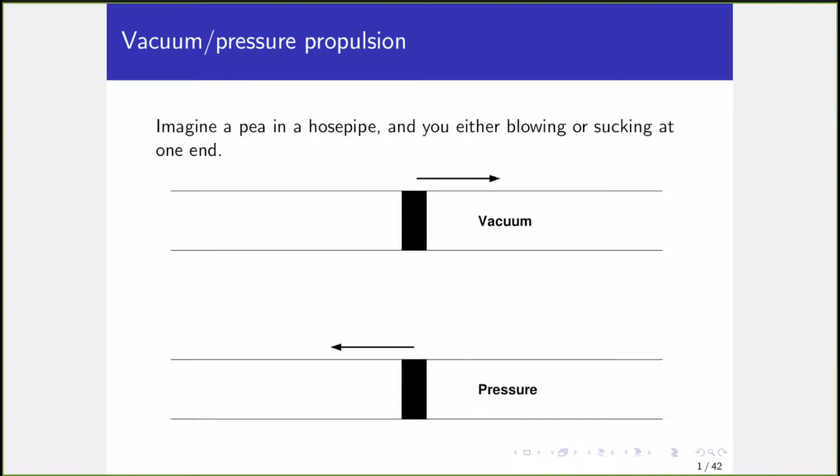So I want you to consider a hose pipe with a close-fitting pea. And then if you blow at one end, you'll not be surprised if the pea travels away from you. And if you were to suck, you wouldn't be surprised if the pea would come toward you. Now think of the pea as a piston, if you will. That's the physics. Just keep it at the back of your minds.

In about 1827 appeared what turned out to be a very influential document by a man called George Medhurst, who actually died that year, a new system of inland conveyance for goods and passengers. And what George was interested in doing was using the principle of the hose pipe and the pea to move people around.

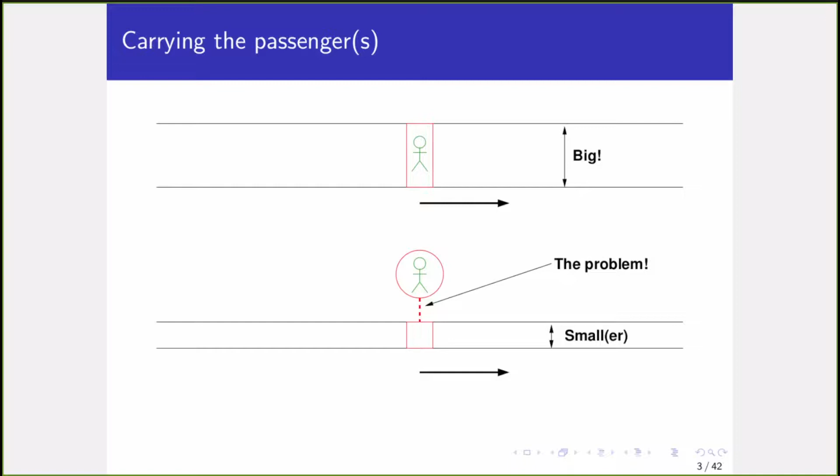Well, of course, if you put the people inside the pea, conceptually inside the piston, this may work, but you're going to need a very, very big pipe, and you're going to need a lot of power to create the blow or the suck. Alternatively, you might have a much smaller and much more manageable hose pipe with a piston within it, which you can push or pull as you please, which is somehow connected to the passengers who are exterior to the pipe. And therein lies the problem. How are you going to make this connection in such a way that the vacuum or the pressure is maintained?

You have to understand what things were like in the first half of that century. Steam locomotion had become a reality in the first two decades or so of that century, and by 1820 was a reality. It was nevertheless very underdeveloped and didn't work terrifically well. By 1830, things had really begun to take off, and there was a massive demand, in the first instance industrially, but increasingly for passenger traffic.

And then by 1840, another 10 years on, this was the period of what became called railway mania. Anybody with a farthing could invest it in the railways and expect to get a good return, and they did. Predictably, this was followed by an economic collapse, 1846-47, and the wheels really fell off the bus, to use a poor metaphor. So Medhurst's ideas being developed in the 1830s were coming just about at the right time. What these people were looking for was a step change in the efficiency and delivery of rail locomotion.

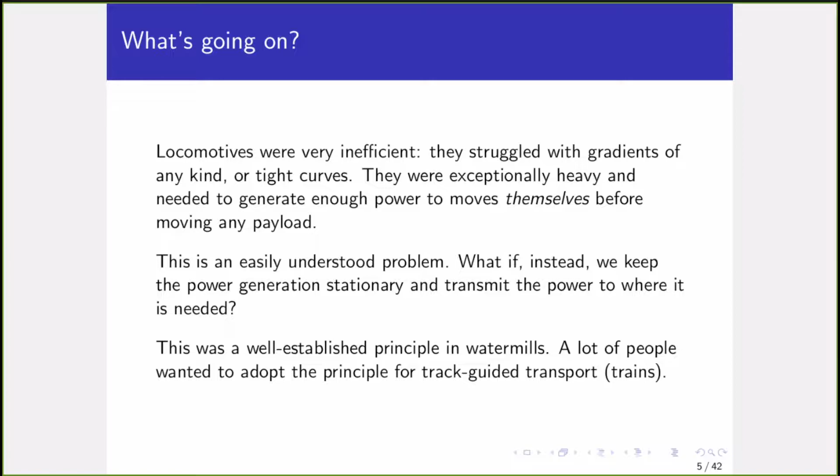The traditional locomotives were exceptionally heavy. They couldn't handle gradients. They couldn't handle tight curves. It took them all they were worth to move themselves before they got going with the payload. And this is an easy problem to understand. If you keep the power stationary and somehow transmit it to the vehicle, perhaps that will be more efficient.

And there was nothing new in this idea. The water wheels are pretty stationary things. They revolve on an axis, but it's possible to transmit the power that they produce through all sorts of axles and belts. So not a stupid idea at all. And as railway mania grew, there was growing interest in the idea of using this atmospheric propulsion, sucking things with a vacuum to move carriages sitting outside the tube.

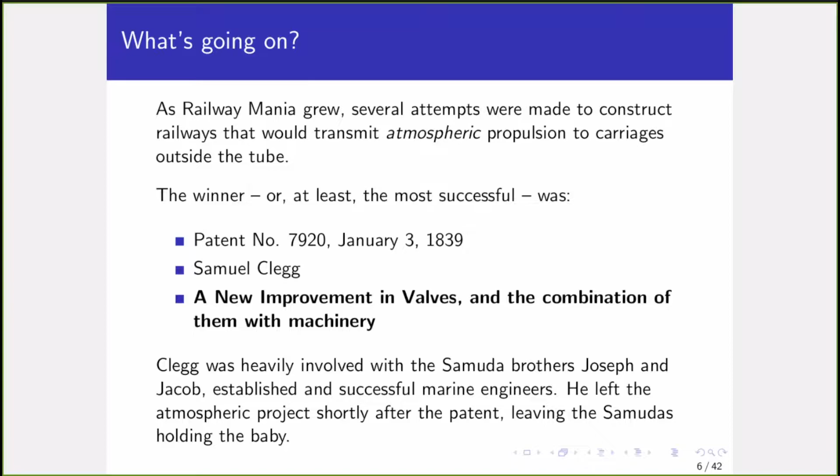And the solution to this problem that gained the most traction was one due to Samuel Clegg, who produced a patent in 1839, railway mania about to take off. Here it was, a new improvement in valves and the combination of them with machinery. And Clegg was heavily involved with some serious marine engineers, the Samuda brothers. He then actually moved on to do different things, and the Samudas picked this patent up and really pushed.

Here's the idea. What you're doing here is looking at a cross-section of a pipe. It's a metal pipe, and there is a slot cut down the top, so it's not a perfect cylinder. That slot is covered by a very long strip of leather, which can rise at one side. There's a metal strip to hold it in place, and then there's a lot of tallow and beeswax, which creates, or is intended to create, an airtight seal.

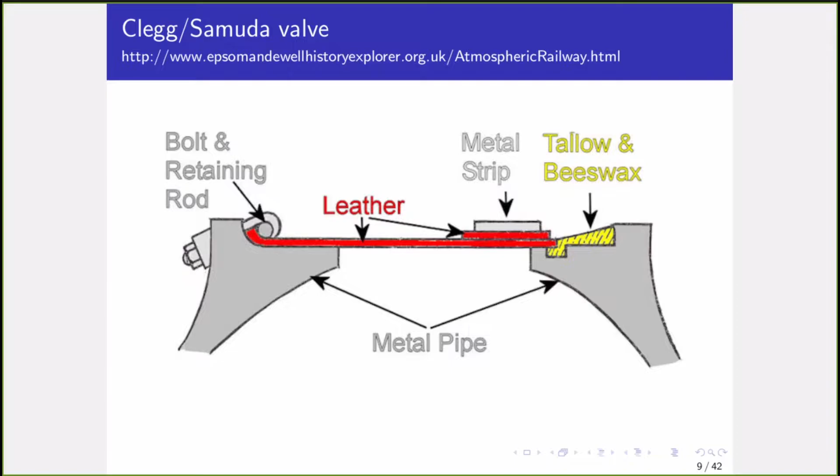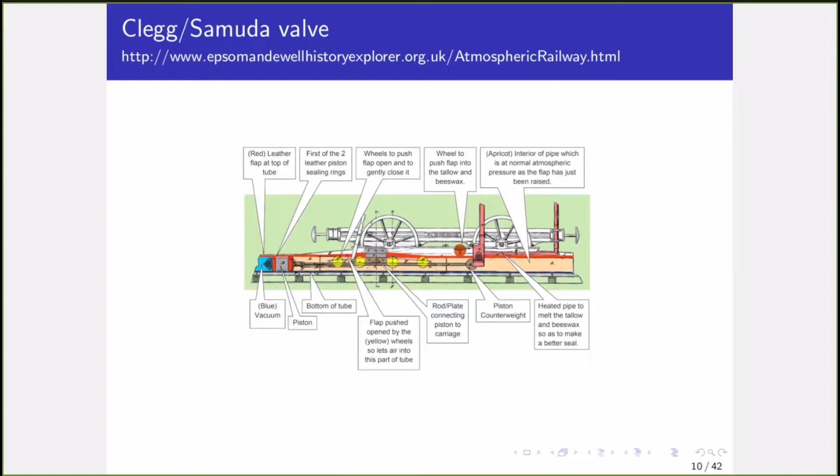Here you see there is the pipe at the bottom, extending to left and to right. Within it is a close-fitting piston. This is the pea, if you like. And that piston is connected to some machinery which goes through the valve, the leather valve, to the vehicle which sits atop. And a vacuum at the blue end will suck the piston, and via the rod will cause the vehicle to move. And that was the substance of Clegg's patent, which the Samudas picked up.

And there followed a very public and very bitter debate about this technology. Brunel was in the forefront of those championing it, and Stephenson was foremost amongst those rubbishing it. And there was a very public row.

With the backdrop of this huge demand for efficient locomotion, in the end, 4 lines were built which used the Clegg-Samuda system. A short one in Ireland, a rather longer and very useful demonstration one in South London, the South Devon line, which many people have heard of, I'm sure, and a short one in Paris.

This was the one which I think became best known. It ran from Exeter at the top all the way down to Newton Abbot and ran down the side of the Exe estuary, which was the broad gauge line which Brunel had already engineered, so he didn't have to create the trackway for this. A distance of some 20 miles, he used 8 stationary steam engines to create the vacuum which would suck trains along.

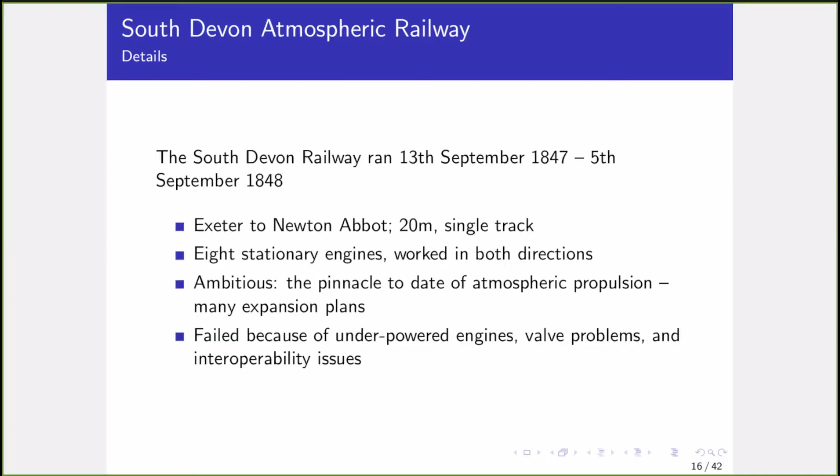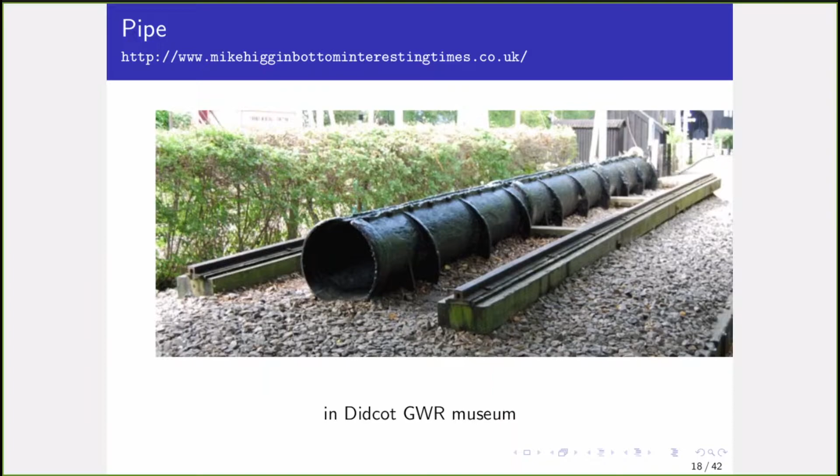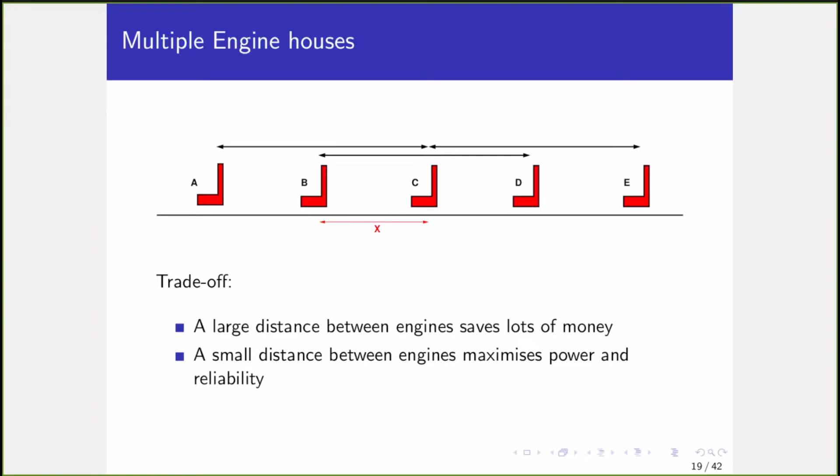All sorts of problems are solved by Brunel, largely satisfactorily. If you've got multiple engine houses, A, B, C, D, E, if you consider, let's say, engine house C, it has to suck air out of the pipe between itself and its neighbours. So the distance between these pumping stations is a very important parameter. If it's a large distance, you're going to save money because you're building fewer engines. If it's a small distance, the railway is going to move more efficiently because it's easier to extract the vacuum. Brunel did all this design before the things were built, so he was taking a bit of a shot in the dark.

The engine houses were powered by the world's biggest steam engines. Brunel was really not short of ambition. He ordered the biggest engines that could possibly be provided. And these were powering air pumps, which were the world's most powerful. Large, expensive machinery, expensive to run. And so they were only driven hard when a train was actually coming. So it was important for the engine houses to communicate with each other very efficiently in order that the engines were only working hard for the minimum length of time. Luckily, telegraph had been developed and was working, but it's another instance of groundbreaking technology being installed as a necessity.

Well, it turned out that what they had thought was a good idea didn't actually work. They were beaten by the materials that were available to them at the time. And by the time they realized this, and Brunel's correspondence with the GWR board can be read to this day, railway mania was over, the economic slump had arrived, and the whole idea, as envisaged by Clegg, Samuda and Brunel, was lost. There were one or two special purpose applications that survived.

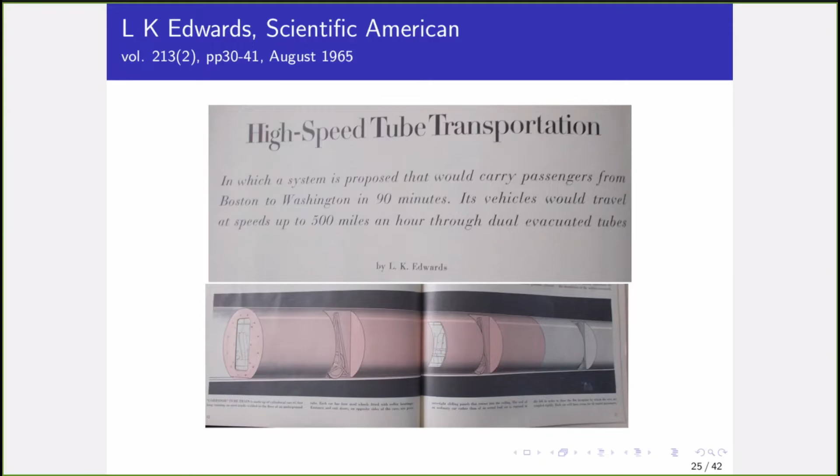Passengers will sit inside these capsules and be sucked along a pipe. And his idea was to connect, let's say, Boston and Washington for a 90-minute journey. And he was anticipating that the technology he was describing, only theoretically, could easily manage speeds of 500 miles per hour or more.

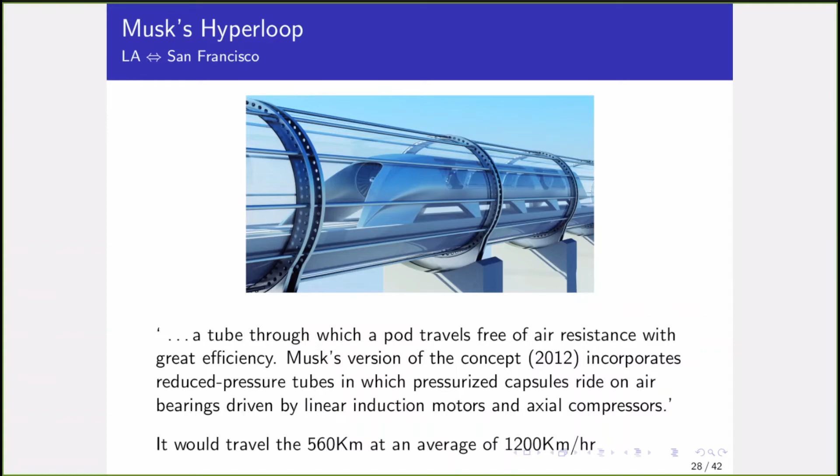Give it another few years and this very recognizable chap appears, and Elon Musk was talking about 10 years ago now about his Hyperloop. And here's a picture. Again, you will recognize what's going on. There's a vehicle inside a tube which is evacuated. The technology really has moved on because he's talking about air bearings and linear induction motors and axial compressors. But Musk is thinking about 10 years ago connecting LA and San Francisco with vehicles traveling at 1,200 kilometers per hour. Think about it.

Musk has actually touched a nerve because a lot of people have picked this idea and treated it very seriously. So you will find around the globe many organizations talking about Hyperloops, which are adaptations of what you saw on the preceding slide. And demonstration systems are actually beginning to emerge, and major installations talking about moving people around at or near Mach 1.

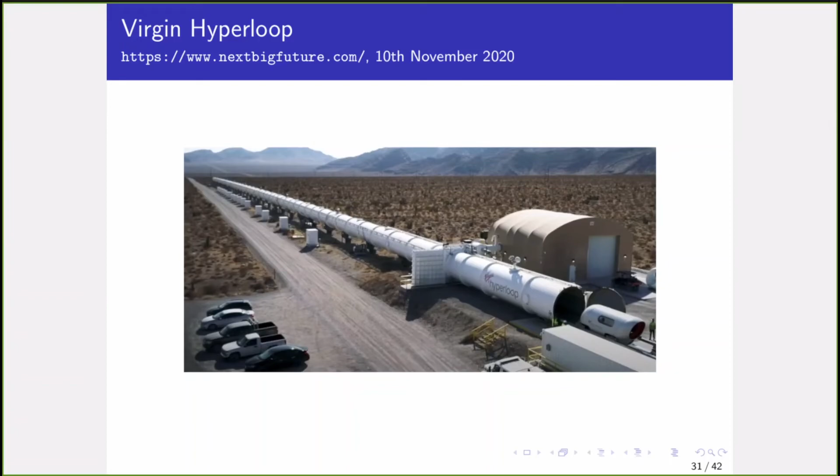And what I want you to think about is that Brunel and Musk, or their organizations, were facing, in some ways, similar problems. There was a demand for a step change in the efficiency and speed of public transport. They face serious financial obstacles, obviously. They face very serious technical obstacles. Engineering has to be groundbreaking, and that's before you begin to consider the health and safety issues and the very popular skepticism that surrounds what they're trying to do. So maybe that's my next TED talk, actually do a compare and contrast on these two guys and what are their relative chances of success.